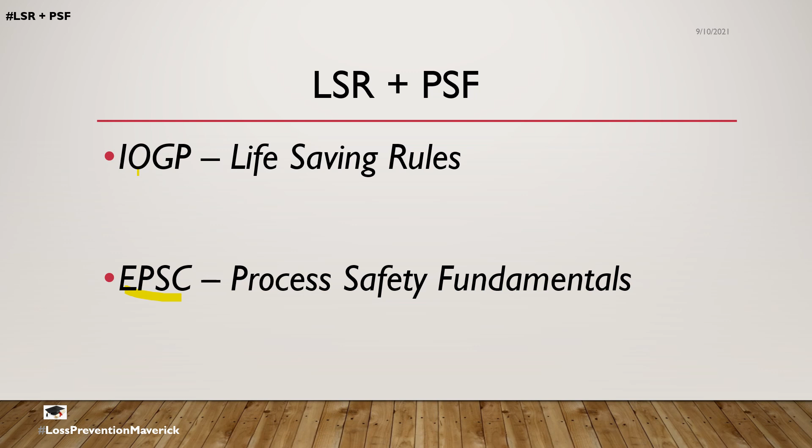The life-saving rules would be as per IOGP, and process safety fundamentals would be as per EPSC. Details would follow.

IOGP is oil and gas producers. The link, I'll be leaving it in the video description, which you can go on and understand about what IOGP does, who all are the partners of IOGP.

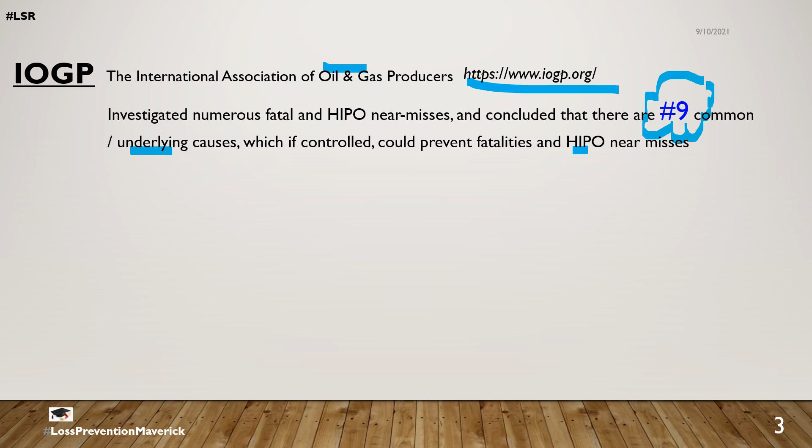So the bigwigs in the oil and gas industry, they sit down and analyze the root causes or the underlying causes to what leads to fatalities and HIPOs, meaning high potential near misses. And statistically they came down to state that there are 9 such factors which, if controlled, can prevent fatalities and high potential near misses. Using this information, IOGP came down to what we now say LSR, the life-saving rules.

So these are the 9 rules which say, if followed appropriately: the rules to be followed while bypassing safety controls, rules to be followed while being in a confined space and working over it, rules for driving, rules to prevent us being in the line of fire, rules to perform while we do hot work, energy isolation, rules for safe mechanical lifting, rules for work authorization, and rules for working at height.

So what is claimed, or rather what is anticipated, is that if these rules are followed judiciously, transmitted and understood by the work performers or job performers, the possibility to have workplace hazards, fatalities, and HIPO near misses can be prevented or reduced.

So it is always said, how do we remember these 9 rules? When we from the process safety and loss prevention department try to bring it up in our campaigns of life-saving for workplace hazards or during training practices, it's always taught to us, yes, it's all good, but how do we remember it? And that is something which our senior management in town hall meetings and all has brought out - how can this be made possible for the common public, for the blue collar, the white collar people to remember?

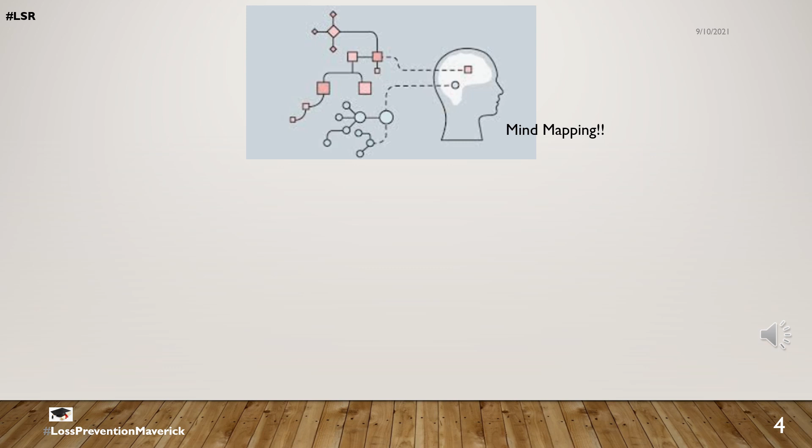And this is where it got us thinking, and that is where I am very excited to bring this video, is about using mind mapping. What is mind mapping? Like this picture shows, it is trying to correlate our need with our daily activities.

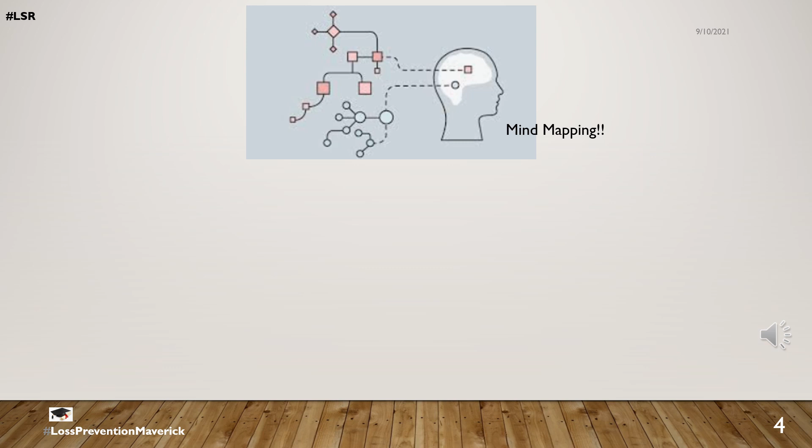Now let's see how we can map the 9 life-saving rules with the daily functions or activities that we see. In terms of activity, now think about a person who is working at height. He loses his balance, loses the control, missteps, and then falls into a confined space.

Fortunately, the fall was not too bad. He didn't break any bones. He's all okay, his motor control is fine. So we go on, ask someone to use a mechanical lifting method to lift the person from the confined space. Now let's see if the magic can work of mind mapping.

In terms of activity, we saw about working at height, and that person who was working at height fell into a confined space, and we used the lifting mechanism to lift the person up. So the person who was working at height fell in a confined space and we lifted him.

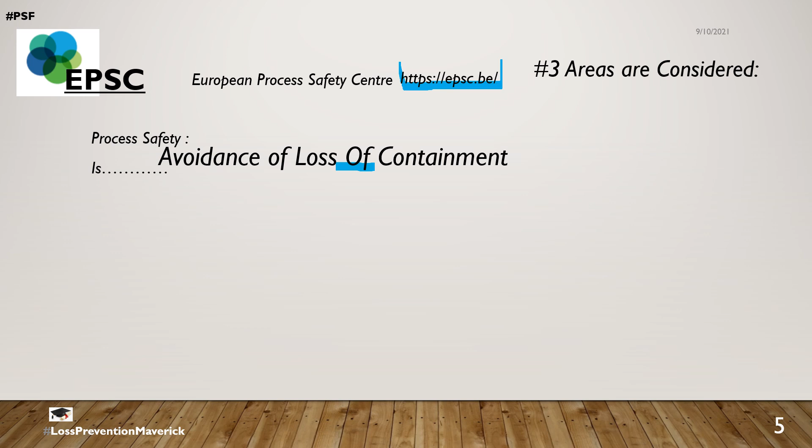So the three areas that they considered are: operational excellence, mechanical integrity, and engineering design. Operational excellence talks about how operations or operators need to tactfully work their operations such that there is no loss of containment. Mechanical integrity, so that once your plant is functioning and running, what all inspection, RBI programs, IOW, integrity operating exceedance windows, have to be considered so that your loss of containment doesn't happen. And of course, engineering design and the safety margin.

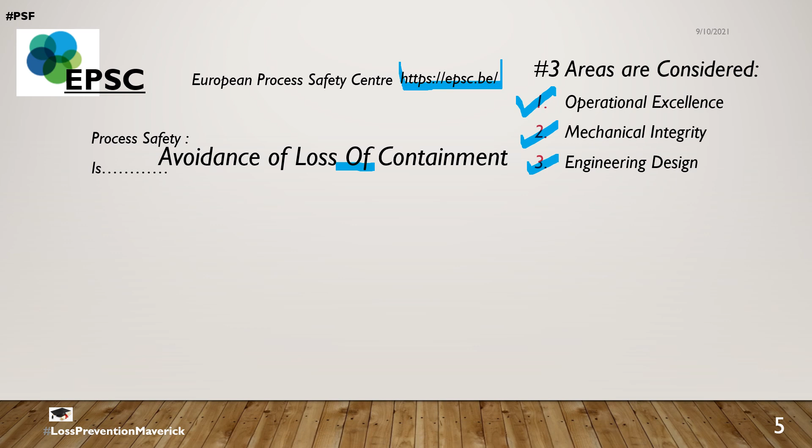Statistically it was seen that operational controls account for around 51%. Which means the corollary is that if we are excellent in our operations, we can reduce the process safety event by more than 50%. There is design integrity of 35%... mechanical integrity of 35%, I beg your pardon, and then design, which includes around 14%.

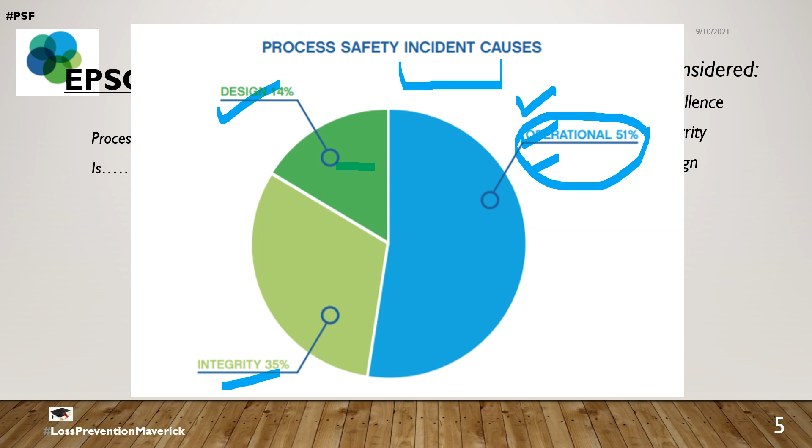Those 18 process safety fundamentals which EPSC identified are: double isolation, first line break, flexible hoses, furnace burners, leak tightness, unloading, open drain, operating limits, overrides, plugged equipment, critical equipment, reporting, runaway, splash loading, line of fire, utility connections, walk the line, and single valve.

So just to recap what we just saw, 51% of the contributors towards a process safety event or a loss of primary containment event is because of poor operational practices, and EPSC has now broken them down into these 18 process safety fundamentals.

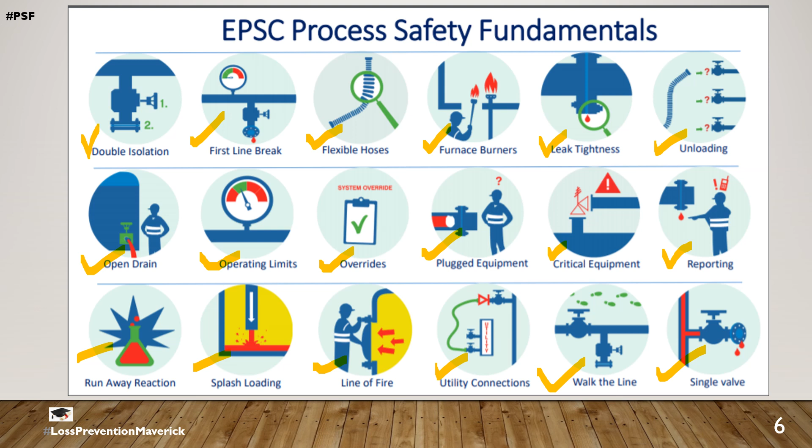We are now going to see how we can not only understand them, but remember them as well. So we saw EPSC giving us 18 fundamental ways of performing operations more carefully so we don't have a loss of containment. But how are we going to remember 18 of them? Well, the nine life-saving rules seemed easier, is it not? Please don't be disheartened or anxious. Brain mapping doesn't limit itself to 9, 18, 9,000, 18,000, or even millions. Our brain has immense potential and we can do much more than we actually think we can.

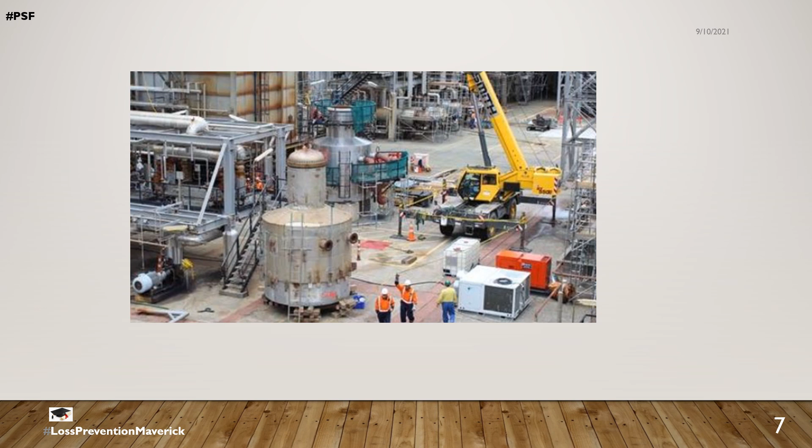So before we come to brain mapping the EPSC process safety fundamentals, let's see a few things. Since process safety fundamentals is about process safety, let's talk about an operating plant. This operating plant is going through something we call a turndown or a shutdown. How do we know it is under a shutdown? Because of the use of cranes, so many people employed on site, generators mobilized, IBCs, and scaffolds being put in. So once a plant undergoes a turndown, there is a process called a startup.

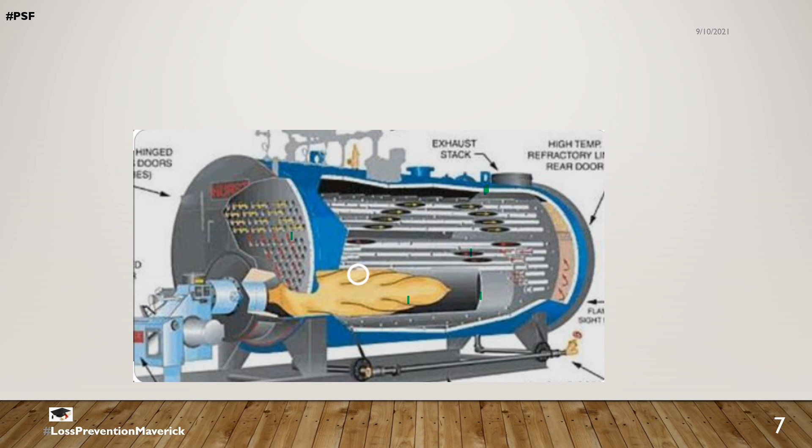The next subject is about a boiler. A boiler produces steam - yes, it's a boiler. And how does it happen? By firing it up. Now please hold on to this thought - this process of turndown, PSSR, and we go home. And the next thought we need to remember is about steam generation in a fired boiler or a heater using a fired operation.

So now, using these two things - what were those two things? A plant which is under shutdown got started up, and once that task is done, we as contractors leave for home. And then making steam using a fired heater, which is a fire-up process.

What was the brain mapping method for LSR? Keanu Reeves matrix - it's a matrix. Alpha Bravo Hotel: activity, behavior, hazard. Activity, behavior - those erratic drivers - and hazard using a work permit system or a work authorization system to control hot work and energy isolation.

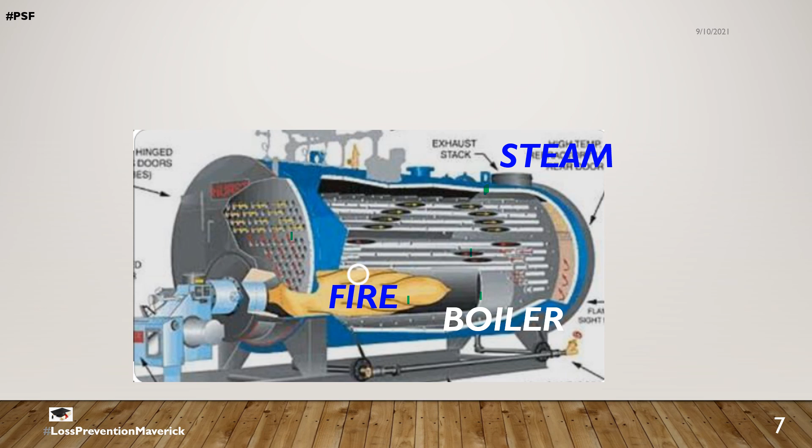So using these, now let's see how we can use these functions in process safety - that is shutdown, PSSR, leaving for home in our Rolls Royces, and steam generation. How can we use this in brain mapping to remember the 18 process safety fundamentals coming up next?

Till now, we are going to see how we are going to remember those 18 process safety fundamentals using the approach of a plant which was shut down, started up, and we leave in our Rolls Royce, and the steam generation. So like we said: shutdown, PSSR, and Rolls Royce.

Let's look into shutdown, the first thing. So what normally happens in a shutdown or turnaround? This is where we do internal inspections, and why we need to do internal inspection - we have to break containment, open vessels, open flanges, isolate those things, test our safety instrumented systems, which are the ESDs, our PSVs which were online, do the required relief valve tests and all that.

So here in our example for shutdown, this is a tank which has a drain valve. This is a stretch of piping which is used to transfer contents from this tank to the next vessel. There are valves over here, and there is another small de-inventorying flange or a valve.

So for shutdown in our brain mapping, what is the operation we do? We have to possibly do double isolation. We will have to break the flange so that we can de-inventory the section, and the tank which had inventory needs to be drained, so slowly the tank gets drained.

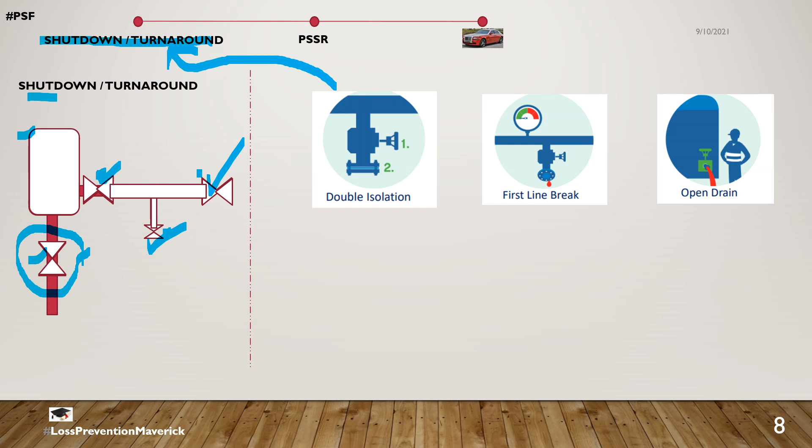All this we mapped to the subject of a plant in turnaround. Earlier we saw how shutdown works and how we could map the shutdown activities to remember the first three things of the process safety fundamentals for ensuring there is no loss of containment.

The next one we are going to talk about is PSSR. What is PSSR? Pre-startup safety review. Let's now see a particular flow sequence. There is a pump taking suction, there are a few flanges bolted, there is a tank, there are level instruments, and there's an alarm.

Since it's under pre-startup, what do we know? Some sort of turndown or shutdown has previously happened. As part of a PSSR, a pre-startup safety review, the definition is that a committee of people sit down, chaired by some process safety counterpart, and they see that everything which was under turndown has been reinstated.

Let's see this example. We have our level instruments, but these level instruments, alarms and pumps are not connected. Why? This has been overridden. So when things that were supposed to be there are removed temporarily for testing, inspection, or plant maintenance, it's called a system override. During a PSSR, there will be something called an override charter, or systems that were overridden.

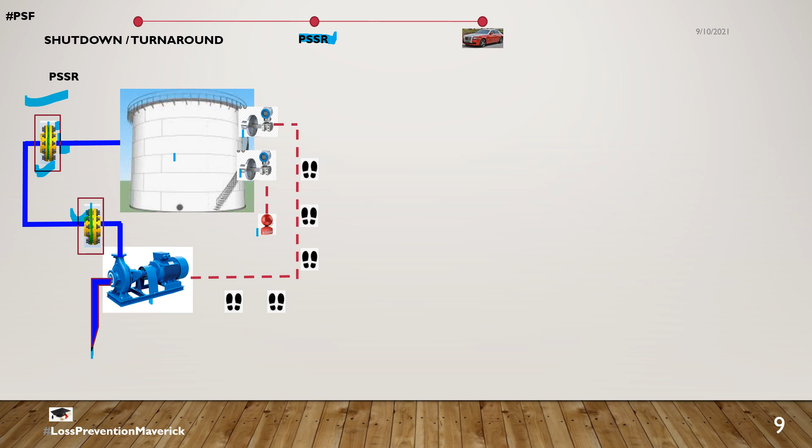Now let's map these three activities: system override, line walk, and leak tightness. These are the next three operational excellence things that have to be put forward so that there is no loss of containment. Earlier in our shutdown, we saw three. Now in PSSR, we saw three more, a total of six.

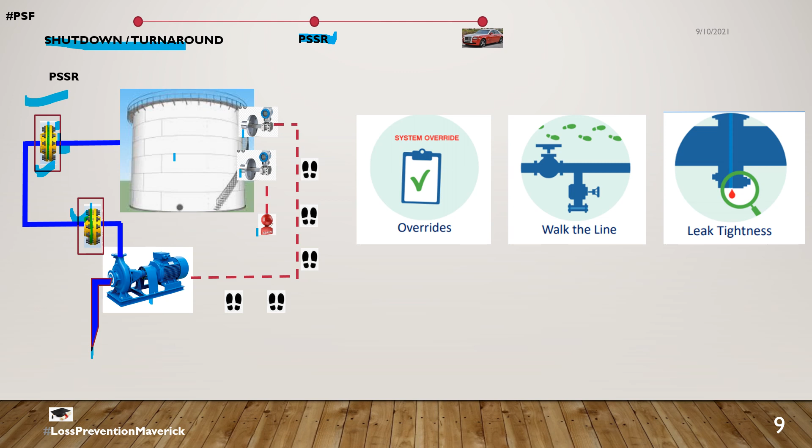Let's do a recap. What did we see in shutdown in our small example? There was double isolation, a line break for de-inventorying, and an open drain. When it comes to PSSR, there is a system override charter, verification by line walk, and leak tightness. Total of six out of eighteen.

So far we have seen how a shutdown or turnaround subject can be used for our need for mind mapping, how PSSR can be used, and now comes our Rolls Royce. So we were part of a long and hectic turnaround. After the turnaround, we sat in a PSSR review, verified things are well, all of us are happy, the plant is now running properly, bells and whistles, all good.

So now let's take our Rolls Royce and go home. Yay! So for this example, our Rolls Royce that we were going for, we didn't fill it up with enough fuel, so now we go to a typical fuel station. This is our fuel station, and we see it has one valve. There is a flexible hose. So we go into the fuel station and engage with the person, requesting him to fill our tank.

Then what happens? The person starts that single valve. Using the flexible hose, the fuel starts filling. And how do we know where we are? Because we'll have an operating limit or a fuel gauge. So here, use of a single valve, flexible hose, and operating limits are the next three things which EPSC tells us. EPSC identified that use of a single valve as a positive isolation is not an inherently good practice.

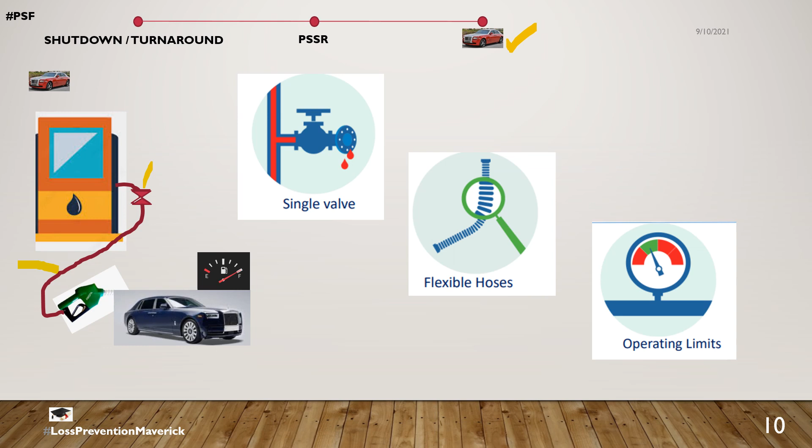Wherever you use flexible hoses for your transactions, please ensure the integrity of the hoses, and operating limits have to always be taken into consideration vis-a-vis the age of the plant. So now, using our Rolls-Royce going home analogy, the next three things have been mapped: a single valve, flexible hoses, and an operating limit.

So guys, using the analogy of mapping our shutdown turnaround or PSSR to our Rolls-Royce, we have actually finished halfway. 9 out of 18 is done.

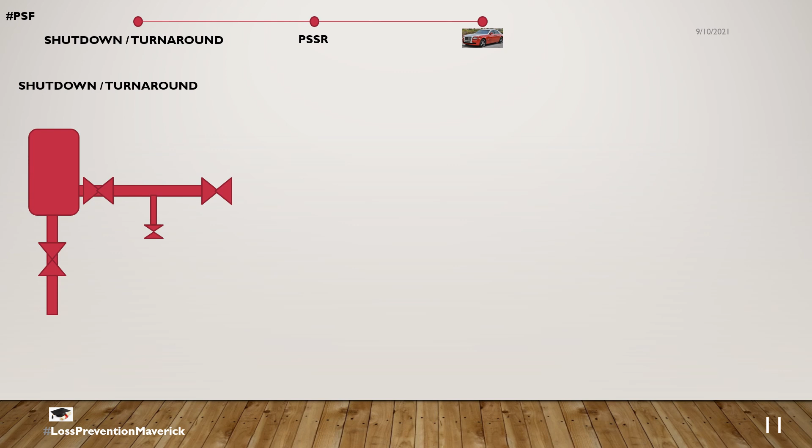Let's do a small recap, yeah, why not? The more we write, the better we remember. During a shutdown and turnaround, gents and ladies, what normally happens? Double isolation, break flange for de-inventorying, open a drain valve, and it's drained.

PSSR, what happens there? There is a system override. We use our line walk to ensure things are in place, and of course, how can we forget leak tightness? In our Rolls-Royce, unfortunately the fuel was low. We go to a fuel tank, we start the fuel valve using the flexible hose. We can see how much our tank is full, and that was our operating limit.

Using the mind mapping and thinking about the sequence of shutdown, startup, and going back in our Rolls-Royce, we have seen 9 process safety fundamentals which, if reconciled, remembered, and put to practice, what EPSC says, and what even I believe, is that we can reduce process safety incidents or loss of containment.

So now, having very effectively mapped 9 of our 18 elements using the analogy of a plant under shutdown, starting up, and going home in our Rolls-Royce, let's come to the next 9, and for this we need to look into our steam generation superheater.

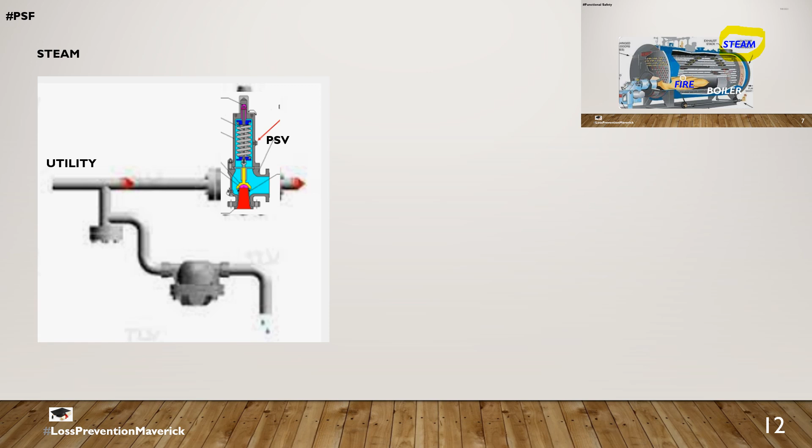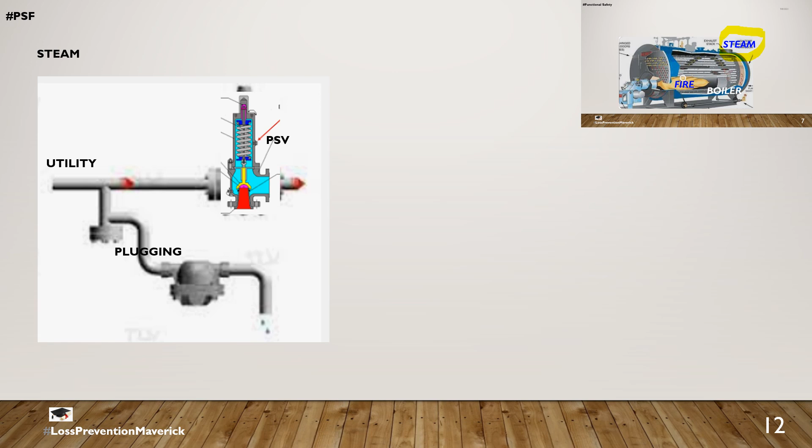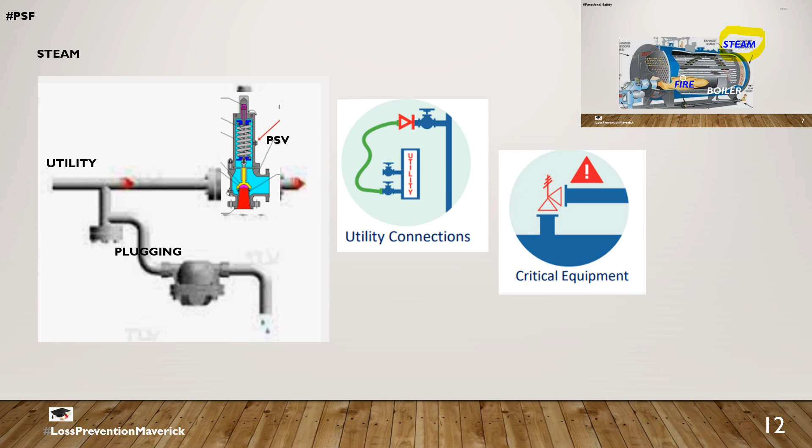So that is a critical equipment in our steam line. For all of us who are in plants, one thing we always have is plugging of our steam traps. Our steam traps get plugged. Now let's mind map these things to generate our next 3 process safety fundamentals. First is utility connection, next is critical equipment - the PSV - and the third is about plugged equipment.

So now moving to our next 9, we just completed 3, using the analogy of steam generation. Steam is a utility service. Being a pressurized service, there is critical equipment which ensures the integrity of the steam line, the PSV, and all of us have plugging issues - steam traps usually get plugged if we don't maintain them on time.

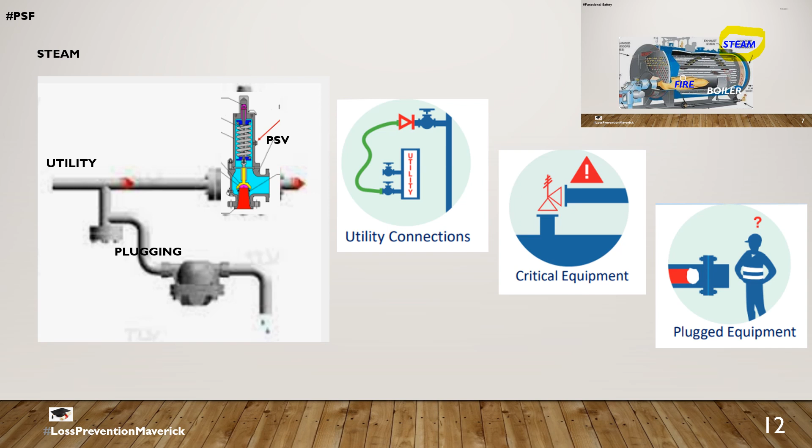We just saw about steam. Now, how is steam being produced? Steam is produced in a boiler or a fired heater. What are the functions that normally happen in the firing of a heater? Let's take this as our example for a fired heater - it's a fuel gas driven heater.

The sequence is: first we ensure there is no flammable atmosphere, the fuel gas has been put in, there is oxygen, the stoichiometry is monitored, then we fire it up, we have controlled combustion, and the heater starts working. But let's say because of some misfire, we lost the particular combustion, so normally what happens? We start the refiring of the heater. Unfortunately, the operators did not really look into the flammable atmosphere inside.

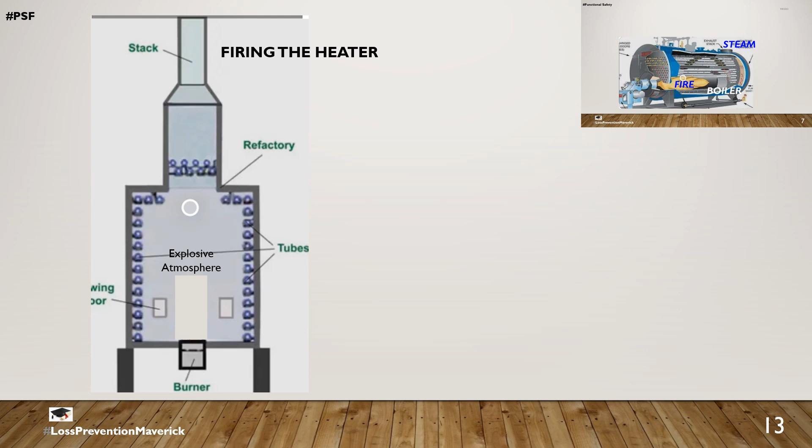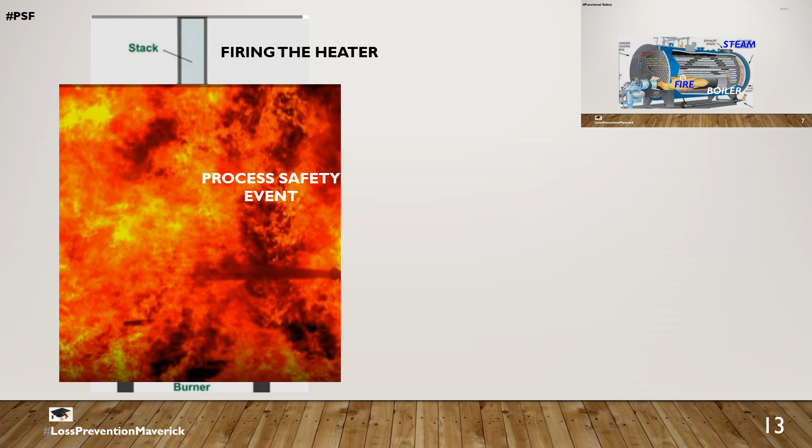It went a little above the flammable limit and became an explosive atmosphere. Unbeknownst to the operator, he fired it. What happens? It goes into a runaway reaction, an uncontrolled combustion, which is an internal explosion - a process safety event happens, and when something like this happens, we all know that accident or incident gets reported.

So we saw about steam. Steam was through a fired up heater. What did we see in the fired up heater? Our mind mapping takeaways are the firing sequence - and the firing sequence, if not made judicious, can lead to a runaway reaction, which was our mind mapped internal explosion. And when an event happens, that needs to be reported, recorded, and investigated. So let's map those three events: the furnace burners firing methods, the runaway reaction, and reporting.

So in our fired heater, we saw that the firing sequence, if not done properly, can lead to a runaway reaction, and when such a thing happens, the incident needs to be reported. So these are the next three. Please don't worry if you are feeling a little bit anxious on how we are going to remember it or how we are going to do all these 18. We are halfway, and it is going to be made easier as we go through the next part of the video.

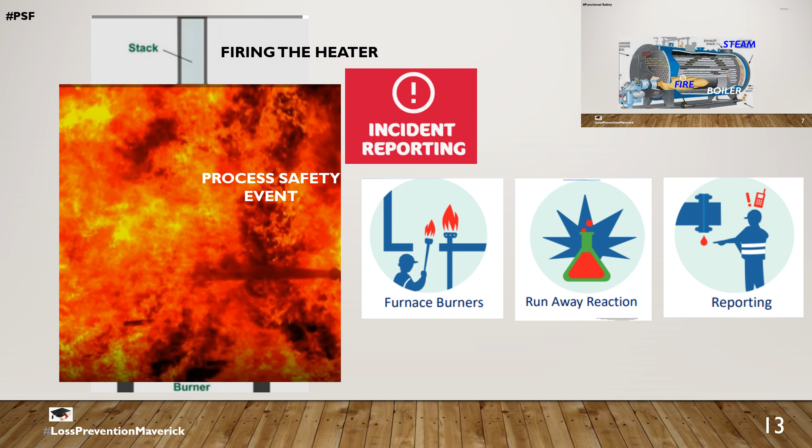So the 18 elements, let me just say that we are 15 down, now only 3 more to go. We saw the steam, we saw the boiler, and now what is remaining? Fire. For matters of our brain mapping or mind mapping exercise, let's think about a firearm.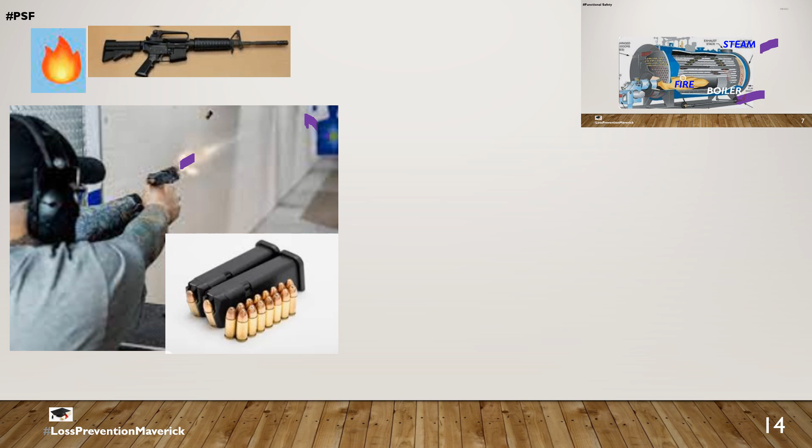Once we run out of our magazine, we need to load more bullets into the magazine, and the next thing I want you to map is something which we all in society are going through, which is about suicides, where people actually commit suicide by firing themselves to the brain and splashing their brain out. I do realize that this might not be the best example to give, but for the purpose of our mind mapping, or let's say for greater good, I have used this example.

So what did we see? We see in a firing training ground, where in the line of fire there was loading and unloading of the firing arm, and then splashing the brains out. Let's map these three things for the last of the 18 elements, the last three things of the 18 elements. That was about line of fire, loading and unloading operation, and about splash loading.

Here what EPSC says is that operations should always ensure that whatever activity you are doing, you are not in the line of fire. For example, this particular operator who is trying to dislodge a valve is towards the line of fire, because the containment is pressurized. So in case it flies off, we can always think that yes, there are retainers over here, but who knows the integrity? So this person is in the line of fire if it comes out.

Then about loading unloading operations, we must have heard about, or in CSB there are a lot of videos of filling operations, like acid being filled to an alkali tank during loading and unloading operations. And the other thing, of having a static discharge while doing loading, is about splash loading. So these are the three things which are the last three of the 18 which EPSC talks about, and we tried to map it in terms of the firing range: line of fire, cocking the gun to load and unload more bullets, and then suiciding by splashing our brains.

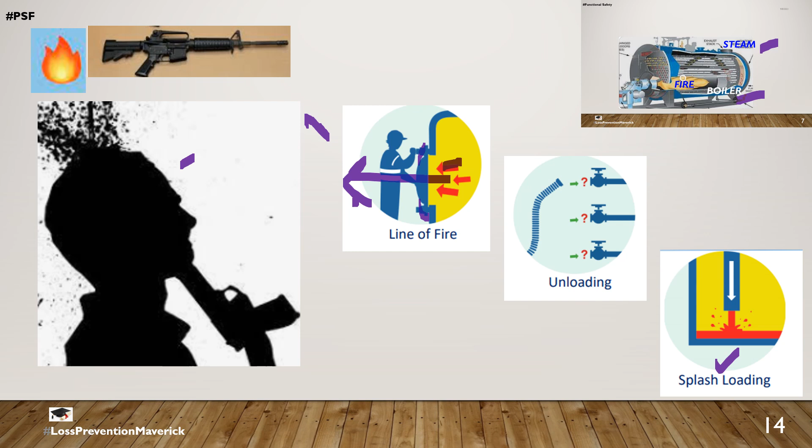So these are the last three ways of remembering, or brain mapping, or mind mapping the 18 elements. Now, using our steam system, steam, fired heater and fire, let's now do a recap, a cumulative recap. And it was about the steam system. Steam is a utility service. PSV is a critical equipment. We always have phased plugging.

For the fired heater, the firing sequence is such that there is a flammable atmosphere, you try to heat it. Because of a misoperation, there was an explosive atmosphere that went to a runaway reaction, as an internal explosion that needs to be reported and recorded. And the last is about being in the line of fire, loading operation, and yes, splashing the brains and killing yourself. So these are the other 9 of the process safety fundamentals.

For all of us who have come this far in the video, please pat yourself and congratulate, because we have finished all the 18 elements and we have seen ways on how to map it. Let's look at it once again right from the start. So we talked about shutdown, PSSR and our Rolls Royce. And in shutdown, what happens? There is double isolation, there is flange crack for de-inventorying, and then we open the drain valve. So that is the first 3.

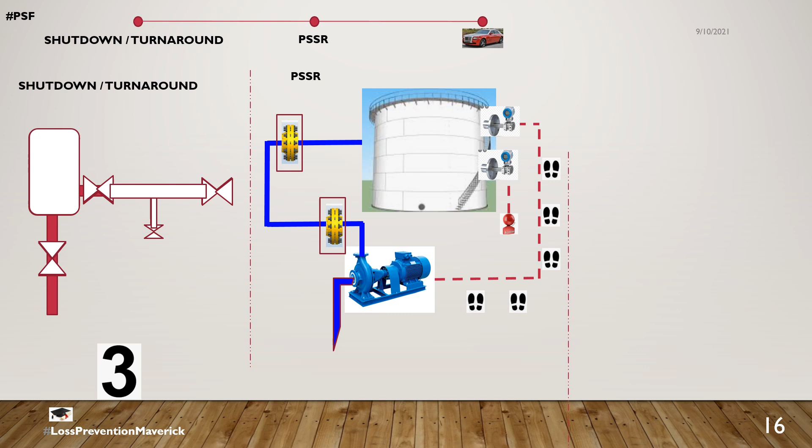For PSSR, what do we do? We have a system override tracker. We perform line walks, and there is of course leak testing. That is the next 6.

For our going back home, we pull over to a fuel station and the kiosk. We open the valve, and using the flexible line, we can monitor how much fuel is there in the gauge, because we have operating limits.

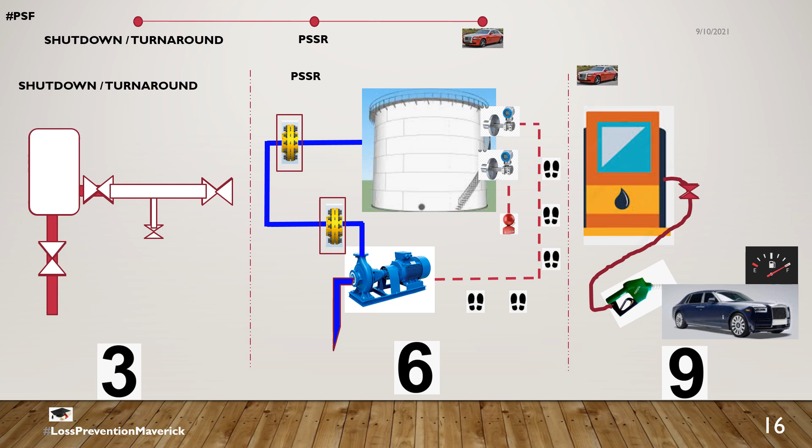These are the next 3, summing up to the first 9 of our process safety fundamentals. Trying to map using the steam circuit.

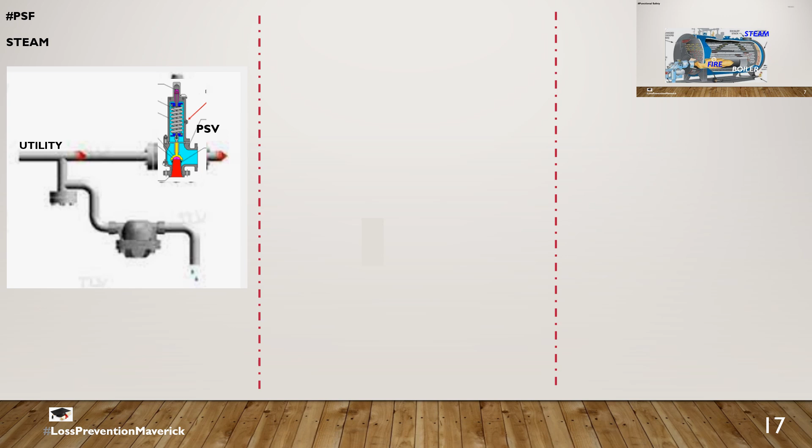Now let's look at all the 3 again. It's about steam as a utility service. PSV is a critical equipment. There is always plugging. So this is the 12 elements of the EPSC.

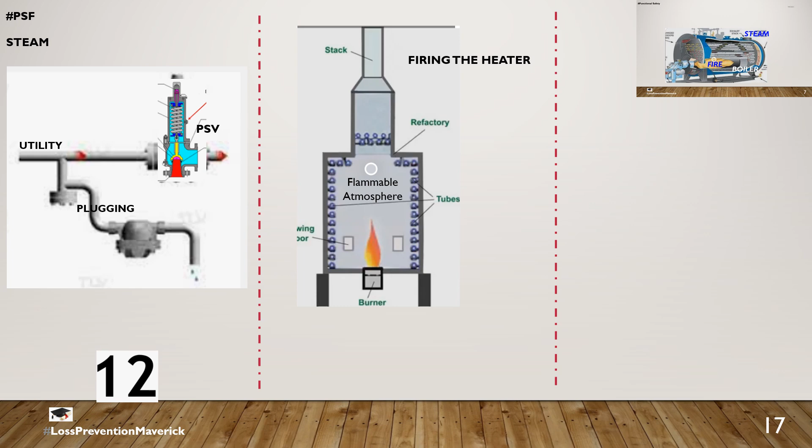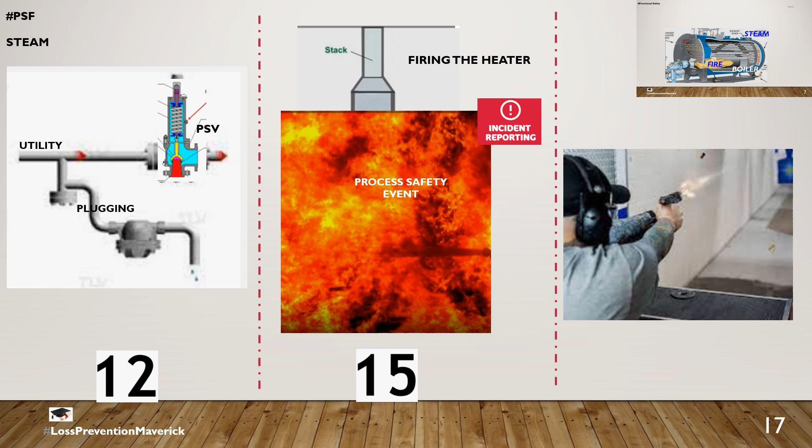Firing heater, the sequence of misfiring leading to a runaway reaction, and that leads to incident reporting, tallies to 15. Last and the least, line of fire, loading operation and splashing the brains out as the last elements.

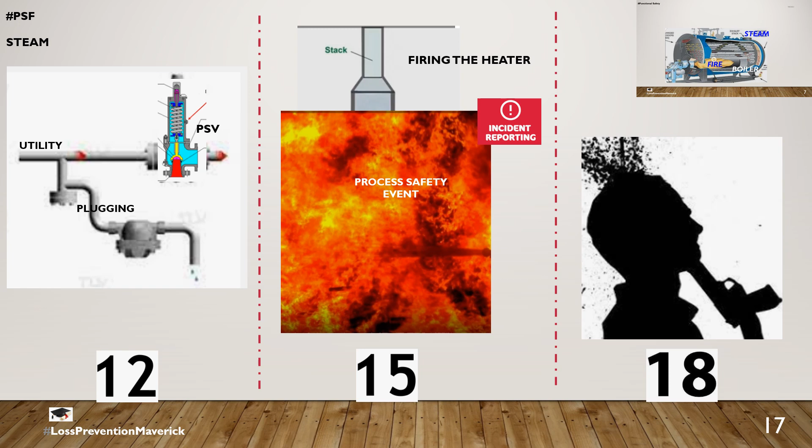18 elements. Before we summarize the 18 process safety focus areas which EPSC has defined, may I please ask you all to kindly pause the video again, just like we did for the LSR 9 elements. Could you all please go through our mind mapping of the shutdown, PSSR, Rolls Royce, and our steam circuit, and try to engage, fish out and memorize how many of the 18 you could remember, and please write it down in the YouTube video and let me know.

Why I am asking you all for this feedback is just to know how relevant this has been to us, because then I can take it back to my area of work and try to bring it out to the people, so all of us can work towards bringing a safer plant.

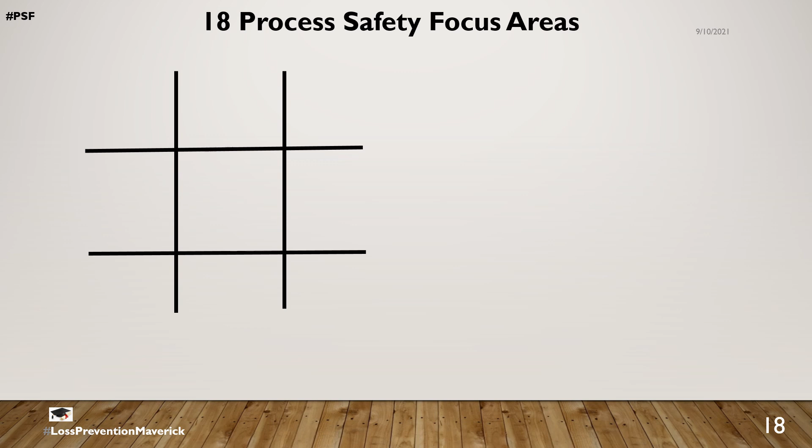So here again we will be working in the Keanu Reeves matrix, about operation, shutdown, PSSR and the fuel. So please lip sync with me, what are these?

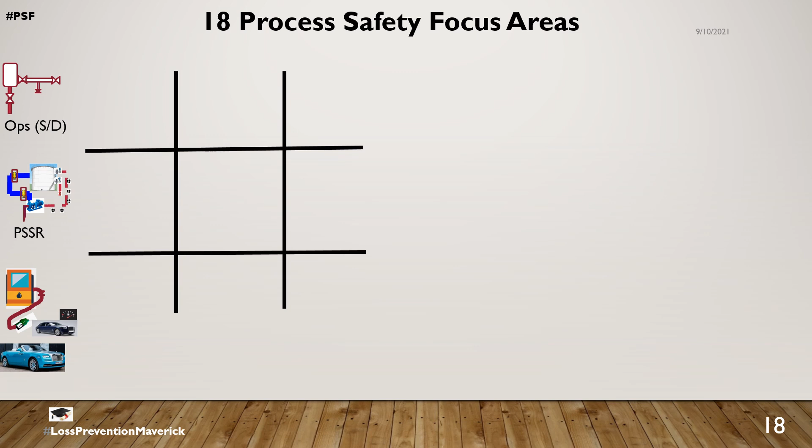Double isolation, line break and open drain, PSSR, system override, line walk and leak tightness, use of a single valve, flexible hoses, and of course operating limits. This is the 9 ones.

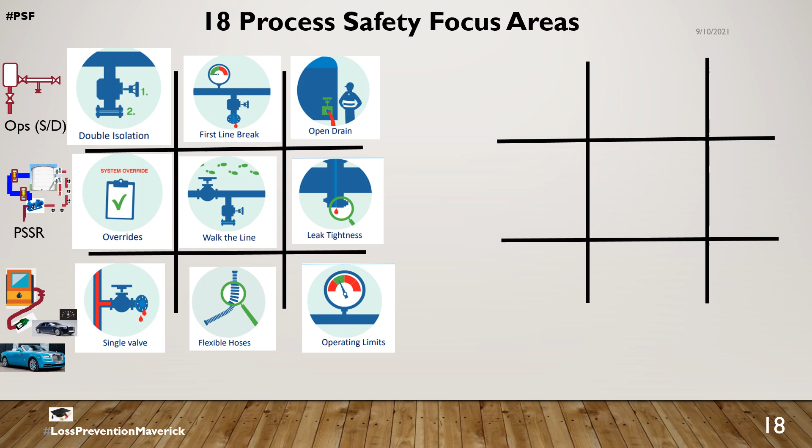The next 9 we have seen: steam system, a boiler system or a fired heater, and fire. Steam system is a utility, critical equipment, and plugged system. For fire we have line of fire, loading, unloading, and splash loading. For boiler, the furnace burners, operations, runaway, and reporting.

Using mind mapping, we have tried to push ourselves, and we've now realized that 18, 80, or however many, we can always use mind mapping to remember, because if you remember you can reproduce, and if you can reproduce this, you can potentially work towards making a safer plant.

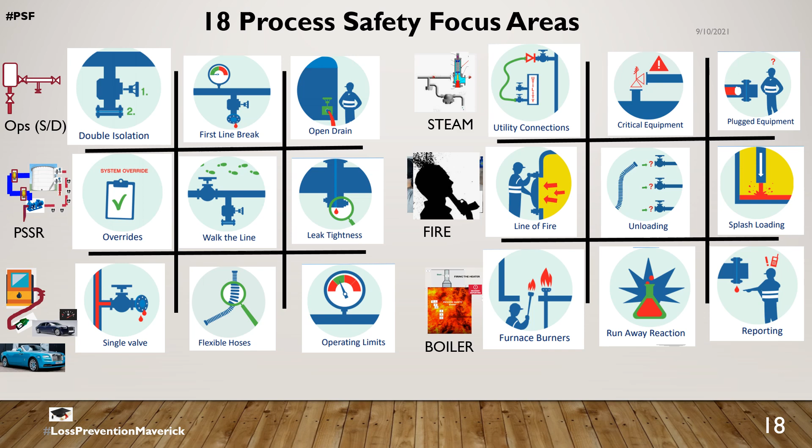We now come to the end of the video about life-saving rules and process safety fundamentals. The credits go to IOGP and EPSC for formulating all this. I've taken a few pictures from the internet.

And now coming to Simon Sinek's golden circle: the why, how, and what. For those who have possibly seen a few of my videos must have noticed that I don't ask for liking, subscribing, sharing, and all that.

The why of my video is because I believe that education is a birthright, and this is my way of democratizing free learning, and learning towards process safety and loss prevention.

How is this going to improve? It is going to improve, I believe, because people who look at it will take away a few things from it, start discussing about this, and spreading this message across their peers.

And what do I aspire for? I aspire to let everyone know that having a YouTube channel, using the internet to spread your message, is not that difficult. It only needs consistency and using some of your time for a greater good.

In my channel, there is always something called attitude for gratitude, and this here that you see is Mr. Chandramohan, whom I very lovingly call Babu Uncle. He is not in this world anymore with me.